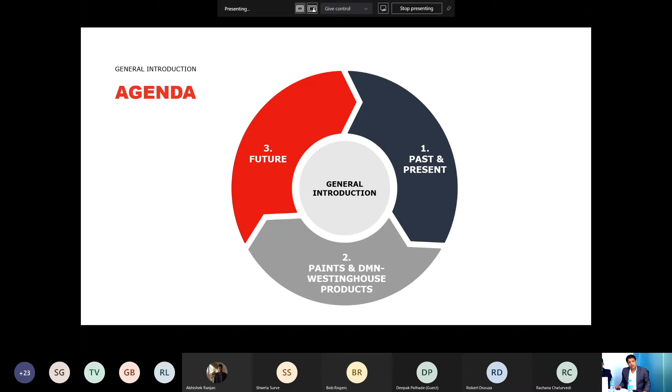In this application webinar, we will be covering topics related to our products and services, past and present, DMN Westinghouse products applied on pigments and paints application, and the future of DMN Westinghouse.

To start with a general introduction on DMN Westinghouse and its presence globally: DMN Westinghouse is a well-established company with future-proof value since 1950. Earlier, DMN was in the shipbuilding business in Amsterdam, the Netherlands, and then in 1969, DMN was taken over by IHC Holland, a company specialized in building ships for dredging. After that, DMN ventured into rotary valves, diverter valves, and other related components for the bulk solid handling industry with a license agreement with Westinghouse UK. In 1998, DMN bought the sole rights from Westinghouse UK for their range of rotary valves and diverter valves and formed the DMN Westinghouse Company. As an independent company, our sole activity is to develop, manufacture, and sell these components.

DMN has expanded its market presence successfully with continuous application-focused efforts in research and development for new innovations. For handling powders in a maximum of 14 destinations, DMN has come up with the 14-port multi-tube diverter valves. For hygiene and easy maintenance, we developed and designed sanitary air purge seals version 2. To work efficiently and effectively, we developed wet and dry CIP options in rotary airlock valves. For safety and damage-proofing on valves, we developed rotor interference detectors. We have the credit of developing the original slide rail valve, and now we are stepping forward with our brand new Dairy MZC2 version, which is unique in the field, best in class design, setting a new standard for hygienic application requirements in the powder handling industry.

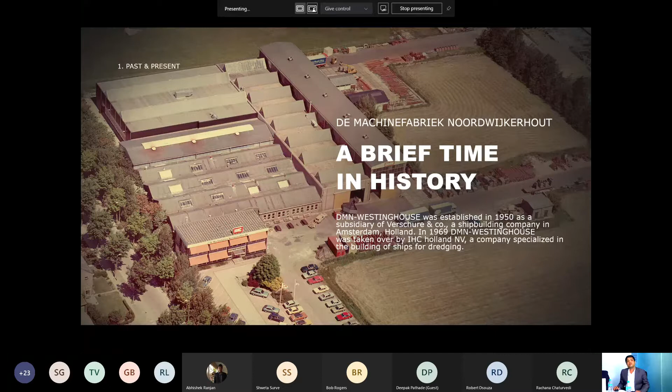Apart from this, we have DMN sales offices across the world to support every customer requirement globally: DMN Netherlands, DMN Components Altshausen Germany, DMN Stuttgart Technique in Germany, DMN France, DMN UK Wiltshire, DMN Incorporated in Arizona, US, and last but not least, DMN India Private Limited at Chennai. As an added feather to this perfectly designed cap, we have 100+ official distributors across 59 countries globally, serving our best-in-class support to DMN customers worldwide.

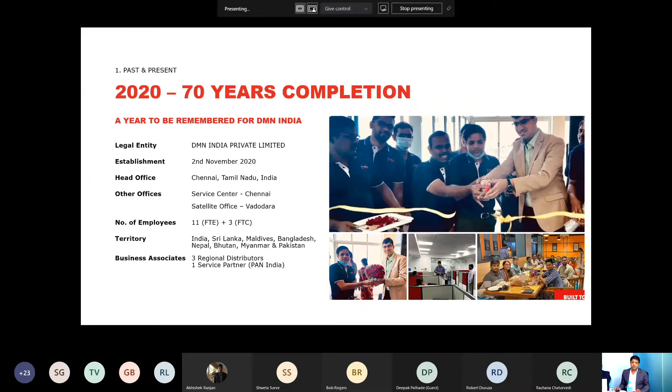Last year, on 2nd November 2020, we inaugurated DMN India Private Limited with head office at Chennai, where we have a well-experienced, technically sound sales and support team, equipped with advanced modern technology machines in our warehouse and service center with DMN-trained service engineers. We have a satellite office in Vadodara and resident sales engineers located in Delhi and Pune. We also have extended support from distributors appointed across India in Delhi, Vadodara and Bangalore, and a service partner in Vadodara to facilitate existing customers in service and maintenance support.

Explaining in detail, now you will see the geographical location of DMN India and their business partners' presence.

DMN India head office is located at Chennai, headed by Ms. Amalraj Rajina. DMN warehouse and service center, also located in Chennai, is headed by Mr. Subramaniam Premkumar. Our satellite DMN office is in Vadodara, headed by our managing director, Mr. Abhishek Ranjan.

Our resident sales engineer in Delhi, Mr. Ravinder Solanki, is supported by our distributor, Erection Instruments Private Limited, Delhi, managed by Mr. Manoj Sharma and Mr. Kalra.

Our other resident engineer, located in Pune, Mr. Tushar Bhagyavant, is supported by Expansion IPS Vadodara, managed by Mr. Swapan Mitra and Mr. Subrato Sarkar.

In South, we also have a senior sales engineer, Mr. Srinivasan Jai Vignesh, and our distributor, Flow Force Engineering Private Limited, Bangalore, managed by Mr. Umapati and Mr. Ramsamy Naidu.

We also have a service partner in Vadodara, Pinnacle Stainless Steel Process Equipment, managed by Mr. Deepak Patade. DMN India also has the pride of covering neighboring countries like Nepal, Bhutan, Myanmar, Bangladesh, Pakistan, Sri Lanka, and Maldives as part of the India cluster business.

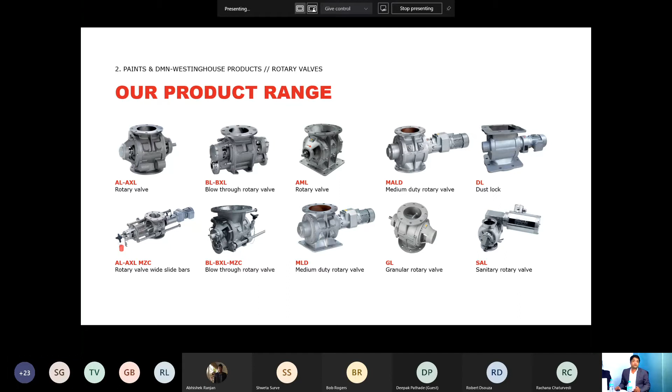All our valves are 100% tested in test stations on different functionalities before being dispatched to the customer's destination. Our rotary airlock valves are designed so that customers can opt for options like different linings, different drives, different capacity, different sealing options, and pressure shock resistance versions. For pigment and paint application industries, normally our high duty rotary airlock valves are used.

Like our rotary airlock valves, our diverter valves are also designed so that customers can opt for options like different linings, different drives, different capacity, and different sealing options. You can get these from us.

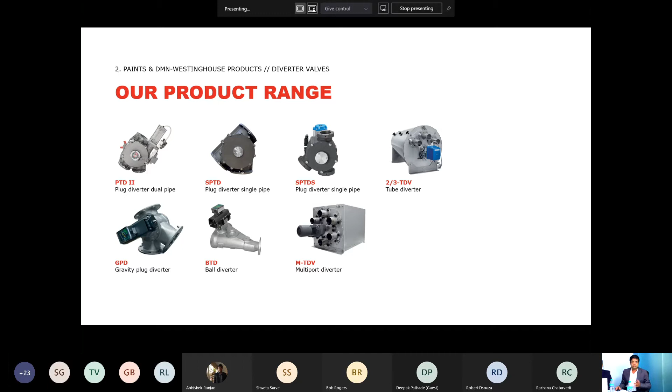Now you can see our DMN Westinghouse company movie.

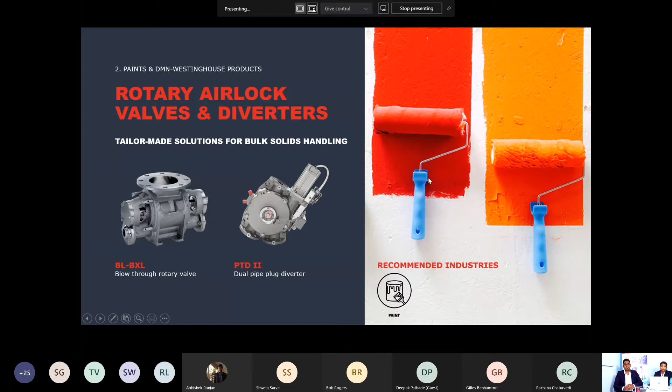Now we'll look further into tailor-made solutions from DMN Westinghouse rotary valves, diverter valves in the paint and pigment industry. Why use a rotary valve? The main purpose of any rotary valve is to maintain the pressure difference from the inlet to the outlet while the material is being conveyed from the top to the bottom.

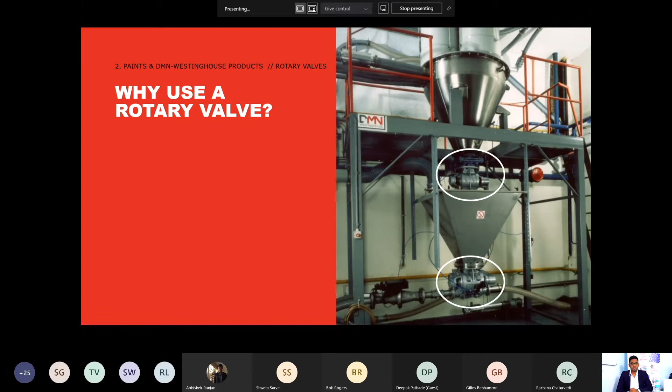It can be a continuous discharge, controlled discharge, and to prevent blocking or explosions. As the picture here clearly indicates, both the discharge application and the pressurized application, where the above highlighted rotary valve discharges and the below highlighted rotary valve is connected to the pneumatic conveying line.

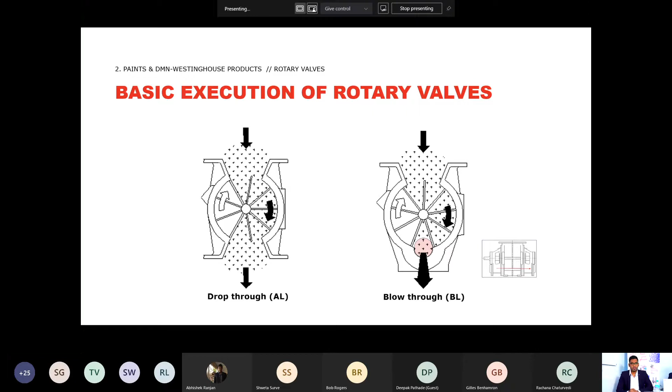There are two basic executions of rotary valves. On the left, it's a drop-through valve. On the right, it's a blow-through rotary airlock, which can be connected to the pneumatic conveying line.

Rotary valves are also called rotary feeders and rotary airlock valves, RALV, which can be used to dose bulk solids in powder or granular form within any process. Our valves serve as an airlock to prevent air loss while simultaneously performing material handling function.

In these slides, now we are going to see the RAL working, how it influences the production process in the bulk solids industries.

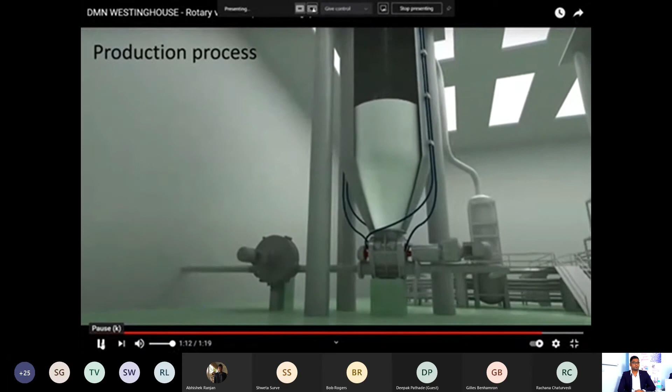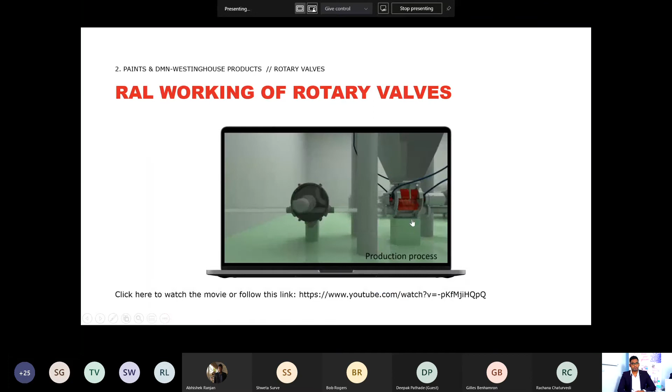Referring to the earlier slides of Mr. Sriram, we have classified our rotary airlock valves into three categories: high duty rotary airlock, medium duty rotary airlock, and dust locks, also called low duty airlock. The main parts of a rotary airlock are the body, end cover, rotor, shaft, and the seals.

In this particular application, we generally recommend our high duty rotary airlocks to our customers. Basically, in a general discharge application, it will be a drop-through airlock, named AL and AML, where AL has round top and bottom flange connections, and AML provides a customized solution of inlet and outlet with square and round flanges, and vice versa.

With pressurized application, it will be our blow-through model, named BL, which comes with round flanges, where our AL and AML series with DMN dropout box can also be connected to the pneumatic conveying line. In both discharge and pneumatic conveying applications, we have our AXL, BXL, and BXXL models with different sizes due to the poor flowability characteristics of the product handled.

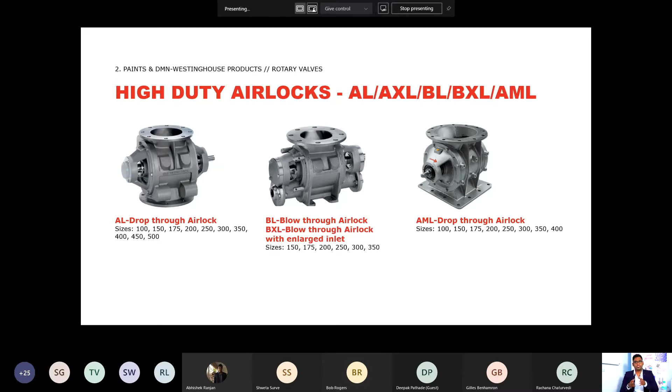As you clearly see, our rotary valve ranges from various sizes, from 100 to 500, with respect to the various executions mentioned. Now we are going to see the different types of rotor types and executions in this application.

With DMN, with 70 years of market experience and great engineering and craftsmanship, our team has done quite a great job developing such excellent rotors with various executions.

As you clearly see in this industrial application and segment, since the product handled will be having very high chemical properties and also toxic in nature with very high abrasive characteristics, we have recommended and supplied the highlighted rotors to these customers as fixed blades and adjustable blades, both used for abrasive products.

Over time with wear and tear, our adjustable blades become a better option and it's also a bit cheaper compared to changing the entire fixed blade rotor.

If the products are more sticky, we can also add a customized rotor, called scraper blades, to this rotor. The third highlighted one is called a semi end disk rotor, which we have designed with such rigidity to handle all the abrasive products, able to provide a better sealing life, and we have supplied a lot of these executions in our rotary valves.

The below highlighted parts, the reduced capacity rotors with different executions, are generally used for dosing applications based on the required throughput from the customer.

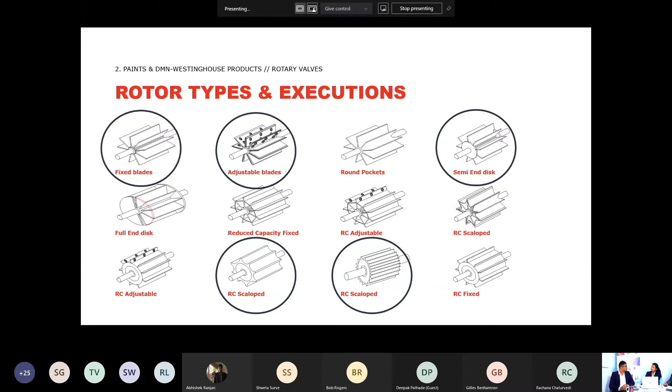Okay, Jay. Can you tell me why DMN Westinghouse rotary was preferred in the paint industry?

Thanks, Pallavi. Thanks for the question. I believe and hope that the guest is also waiting for this particular slide and the question.

Our rotary valves are robust in design, which can handle all kinds of dry, abrasive products such as talc, dolomite, calcium carbonate, titanium dioxide, carbon black, china clay, specialty chemicals, and various pigments.

DMN Westinghouse has its own unique selling point by offering various solutions to customers, process lines, and systems. Our rotary valves have high filling efficiency with a sheared angle inlet, which can be customized with minimal leakage.

Our valves are preferred among integrators globally and locally across different regions, as they mostly want trouble-free operation, fit and forget rotary valves. Therefore, DMN Westinghouse is most commonly preferred in this application.

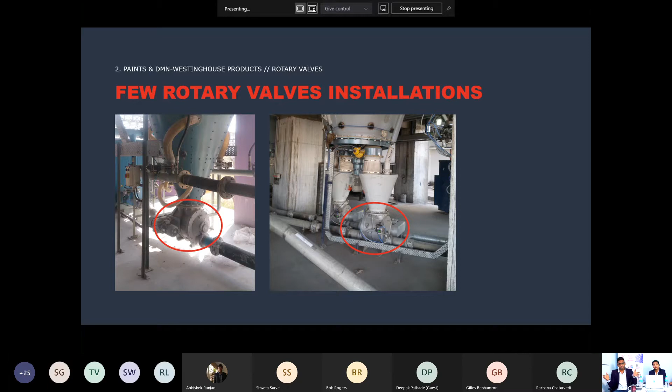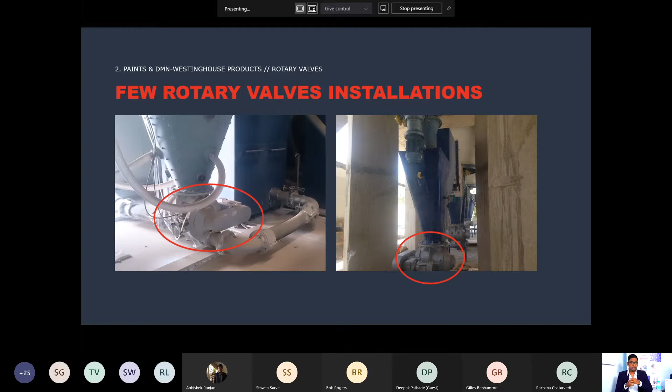Now we are going to see a few of our critical installations of rotary valves at esteemed customers across the globe and India cluster. In this picture, you can clearly see our rotary valves installed in a series of connections on the right. On the left, it's a drop-through valve with a dropout box connected to the pneumatic conveyor.

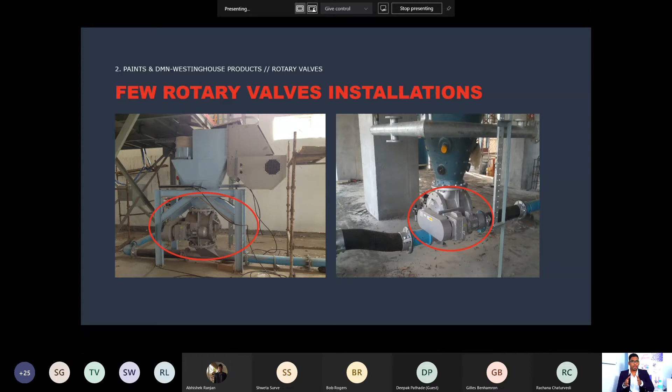Even our drives are flame-proof executions under ATEX, which can be classified under ST1 and ST2 options. As per customer preferences, we provide different shaft sealing options with respect to gland, lip seal, and air purge options with the flow meter.

Now we are going to look at diverter valves, which are essential to any system. They are specially designed for rapid pipe changeovers of powders or pellets in the pneumatic conveying system or in gravity flow. Our PTD2 plug type diverter is one of the greatest designs we have developed.

It is very unique due to its proven performance in the market, and has been very distinctive in this field. We have different sizes of PTDs ranging from 50 to 200. In the PTD2 plug type diverter, we can do both diverging and converging from one place to another.

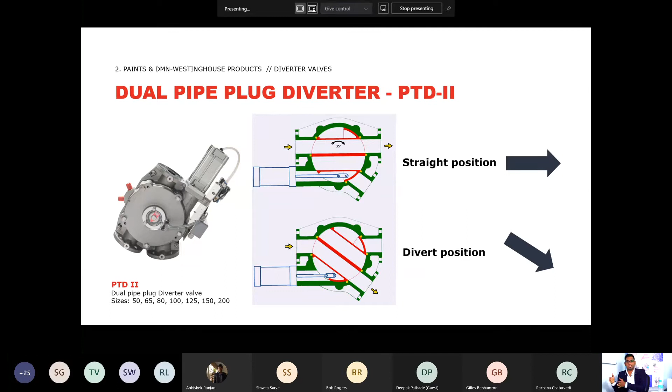Now we are going to see a small working video of the PTD, which clearly shows its operation, acted by a double acting pneumatic cylinder, which can also divert up to a 35-degree angle.

Our PTD models have two options. Based on the pressure, we have designed static and inflatable seal options as per customer requirements.

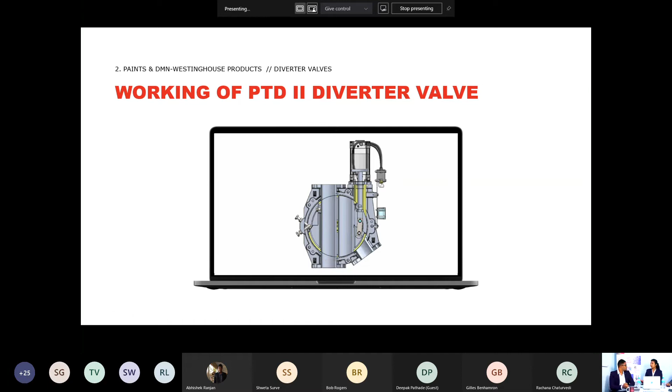Thank you, Jay. Thank you for your valuable information about our rotary valves. What about diverter valves? Why are they preferred in the paint industry?

Thanks, Pallavi. I hope everyone is also curious about these slides. With respect to our diverter valves, which are very robust and unique in design, they can withstand minus 20 degrees Celsius to 80 degrees Celsius, and go up to 120 degrees Celsius.

It can handle all kinds of granular material, dry and abrasive products, which can be very abrasive, dusty, and wear-inducing in nature, such as calcium carbonate, titanium dioxide, carbon blacks, various pigments, and specialty chemicals.

DMN Westinghouse plug type diverter has various customized options too, which we can upgrade with pipe coating like chromium plating, plasma nitriding, and we can provide a modified inlet for flanges, which can be mounted positionally.

We can also provide polishing of the diverter up to 0.8 micron finishes, and we can provide different voltage options subject to availability and customer requirements.

Furthermore, along with the pneumatic cylinder, we can add an electric actuator, also a visible plexiglass end cover too. Our diverter valves are proven over these years, which makes us very strong in this segment and preferred by the end users along with the integrators.

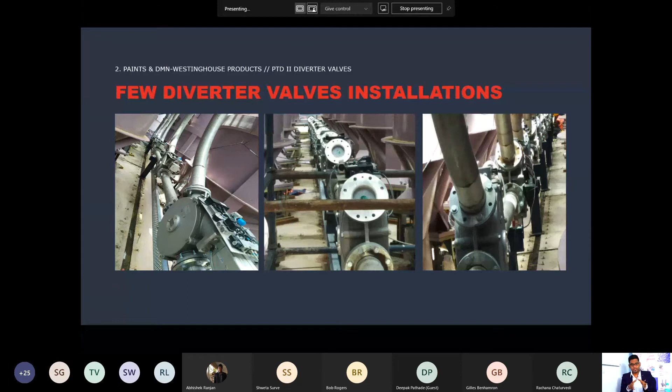Now we can see the critical installations of our diverter valve with huge quantities due to the sleek performance and its versatility. You can see the series of connections and these mounting positions, series of vertical installations, horizontal installations, everything. Adding to all the above, our diverter valves are IP65 rated, which can be placed in outdoor conditions in both sun and rainy conditions, which we can clearly see in these slides.

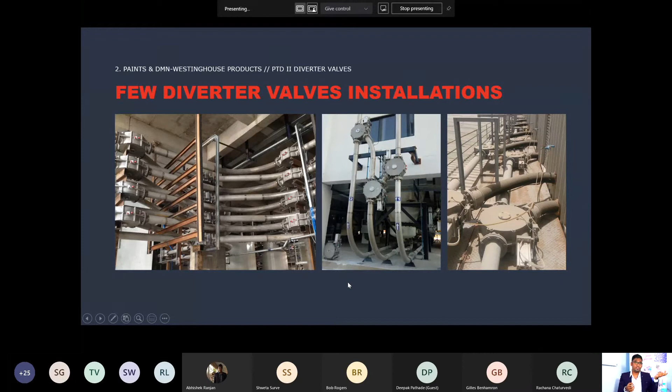Thank you, Jay, for your brief explanation on the application. Now we come into the service and maintenance part.

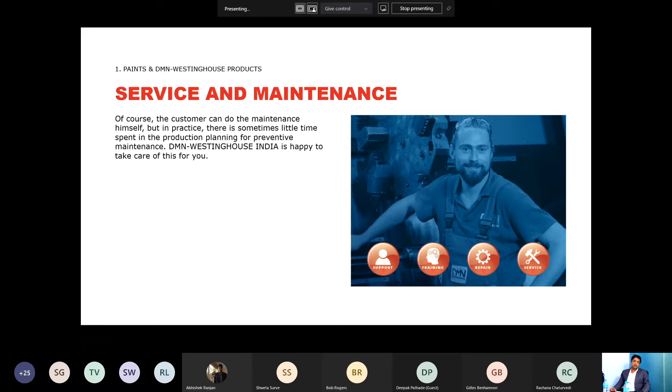DMN has been successful in the powder handling industry for the last 70 years because of our 100% dedication towards customer requirements, and service plays a vital role in that. We serve our customers 24/7 and 365 days globally.

We provide expert advice on installation and commissioning support at site through our service team. Our engineers train the customers on operational procedures, like how to operate and check the healthiness of the valve in working condition, as well as how to maintain the valve in ideal condition for a trouble-free startup.

We also guide our customers on maintenance aspects like preventive maintenance, condition-based maintenance, and corrective maintenance, as well as daily, weekly, and annual maintenance. For annual maintenance, we have annual maintenance contracts available. Customers who have large quantities of valves from DMN can opt for an annual maintenance contract if they wish.

Our engineers are also trained well enough to give virtual training to customers. In this COVID-19 pandemic situation, we supported our customers through this virtual mode and installed quite a number of valves in different parts of India and neighboring countries, and for service also we have supported them this way.

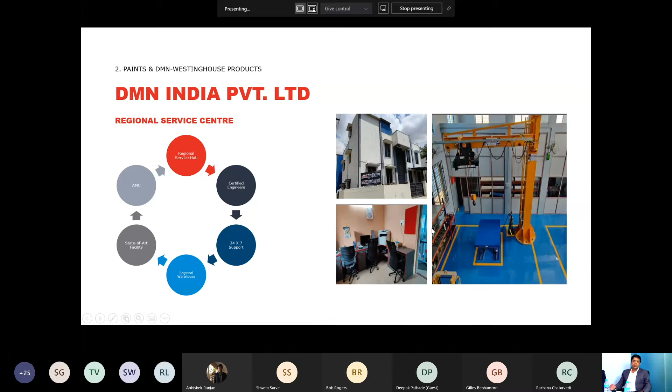Our service center is well equipped with the required tools and tackles and modern technology to provide in-house repair facility for troubleshooting. We also provide on-site service visits based on customer requirements. At present we maintain minimum recommended spares to provide timely service support, and in future we are planning a full-fledged service center with all required spares for the valves.

DMN is rewarded by the following certifications: ATEX 2014 certification for dust explosion. We have valves for ST1 and ST2, and we are developing valves for ST3 powders with KST values more than 300.

Rotary airlock valve certifications, like equipment as well as autonomous protective systems, are available with us. Diverter valve external ATEX certifications are also available. We also have EHEDG certification, the European Hygienic Engineering and Design Group certification for food and dairy industries.

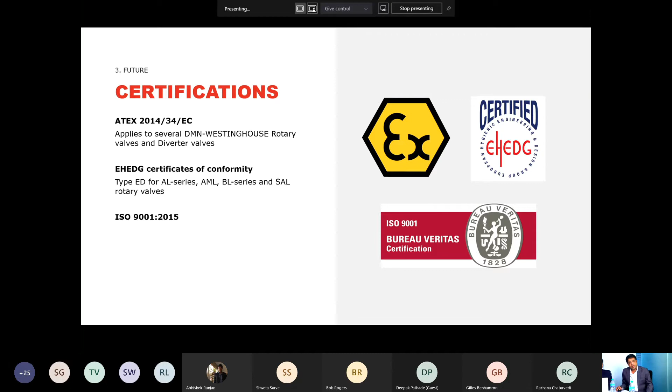We are ISO 9001:2015 certified for producing high quality valves in an efficient and safe environment. Our DMN India Private Limited office, warehouse, and service center will also be certified for ISO soon. We also have international certifications like USDA, NFPA 69, EAC, EC 1935:2004, and FDA.

As earlier informed, DMN concentrates solely on rotary valves and diverter valves. DMN valves can be upgraded at any time at minimum cost with respect to requirements like temperature, hygiene, product change, and much more. DMN is able to supply spare parts for long-term operational valves also. Due to DMN's presence in almost all sectors of the industry, DMN takes all necessary steps for continuous research and development to implement new advanced technology in the valves.